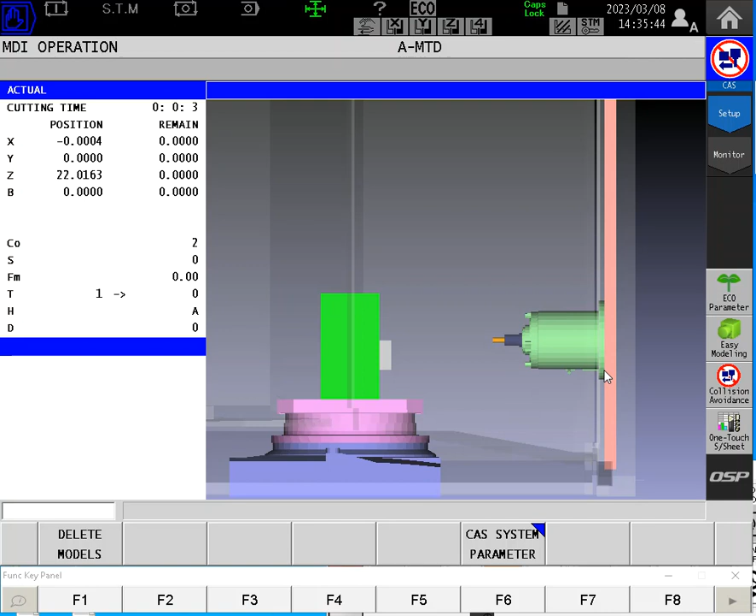Today we're working on fixture tracking, or CALL OO88. I'm on the road today, so this is going to be kind of a rudimentary video. I don't get to do all the flashy stuff I usually do, but we'll get the gist of it, right?

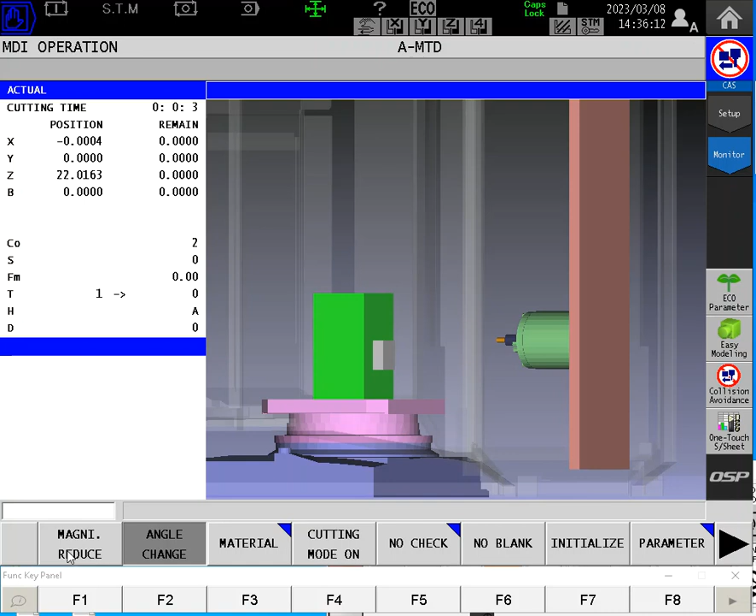So what we're doing here, we have our static fixture tracking system for horizontals that we're working on today. The code to activate that is CALL OO88. That is 2 O's, not zeros. CALL OO88. And I had a customer give me a shout and say, hey, you know what, I'm having a little trouble with it, and I'd really like to know if it's functioning properly. How can I check it?

So here's what I'm doing. I have my regular tombstone sitting here, this little guy. And then I just stuck a block of material on there. You know, doesn't matter what it is. Put a tool in the spindle, and I prefer a pointed tool, but right now I've got an end mill. That's going to work for us.

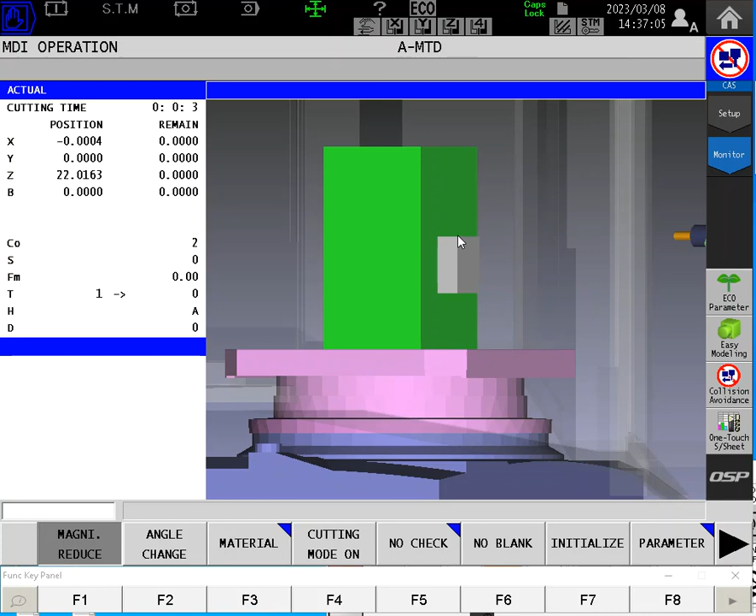So I want to set a work offset for this block, as I usually would, with a Renishaw probe, an edge finder, however I would do it. But I need to have a work offset set for that. Then I have to make sure that my tool is gauged properly. So right now, my work 0 is the face of the material, and the X0, Y0 is this upper corner right here.

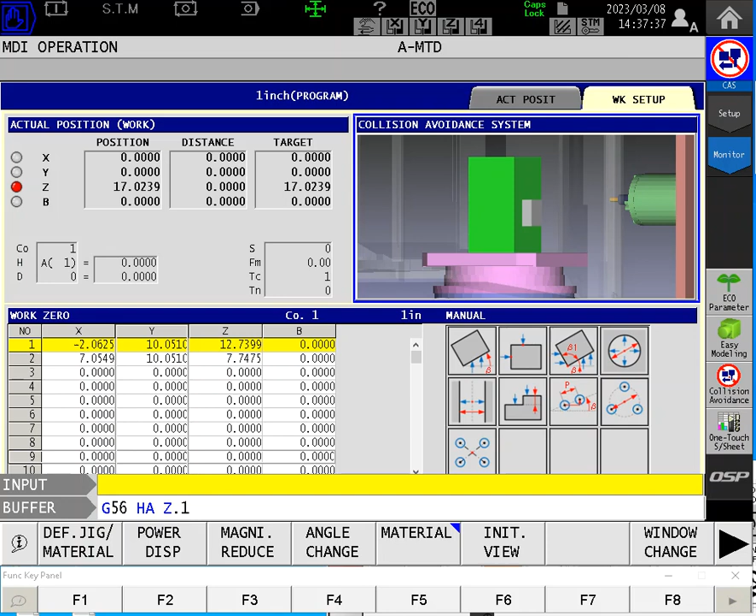So just to show you how this is going to work, I'm going to call up that work offset, G15H1. We'll execute that little code, and now I will say G0 to X0, Y0. And the machine will now position the tool directly over that corner. And if I G56 HA Z.1, that means read the tool height offset, move to 100 thousandths over the top of the part. Zoop. Now, if I blow up my collision avoidance screen here, you'll notice that.

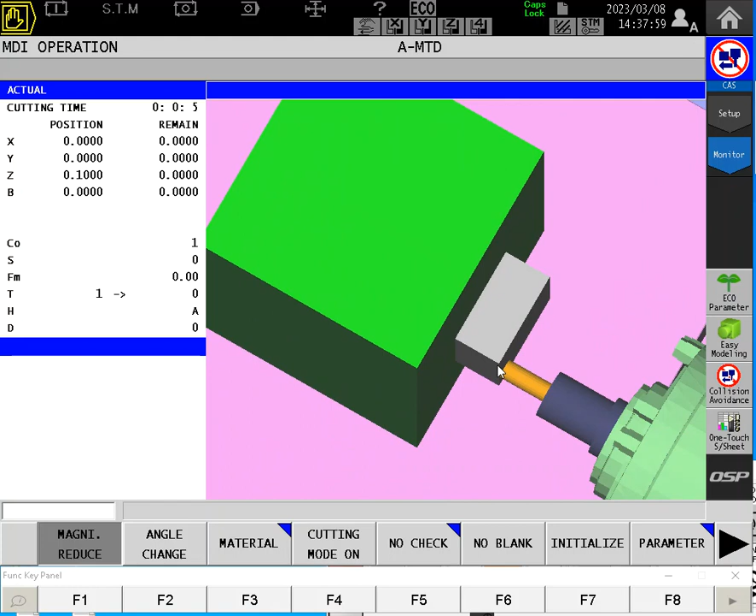Let's move it around so we can see. My tool is positioned. Oh, that disappeared. That's perfect right there. My tool is positioned directly over that corner of the material and 100 thousandths from the face of the part. So there we go. It'd be easier for you guys on an actual machine, but now I can see that the tool, if it were pointed, would be directly pointing at that upper corner of the material.

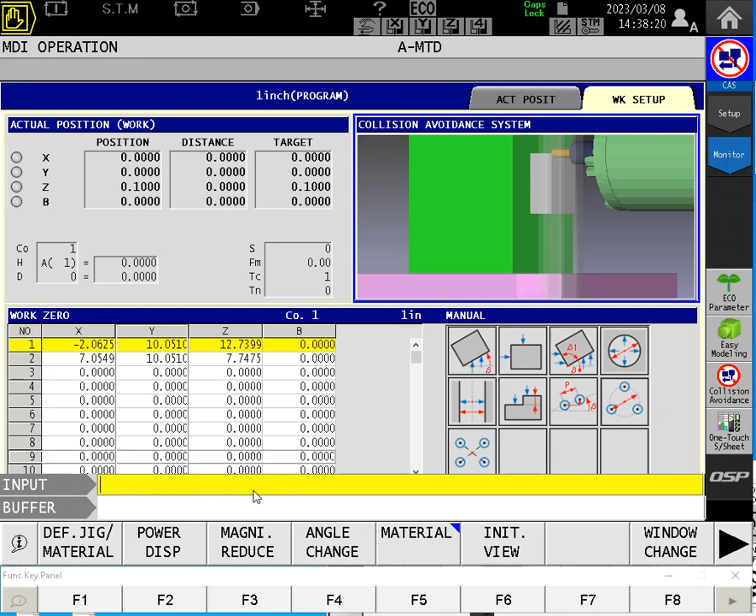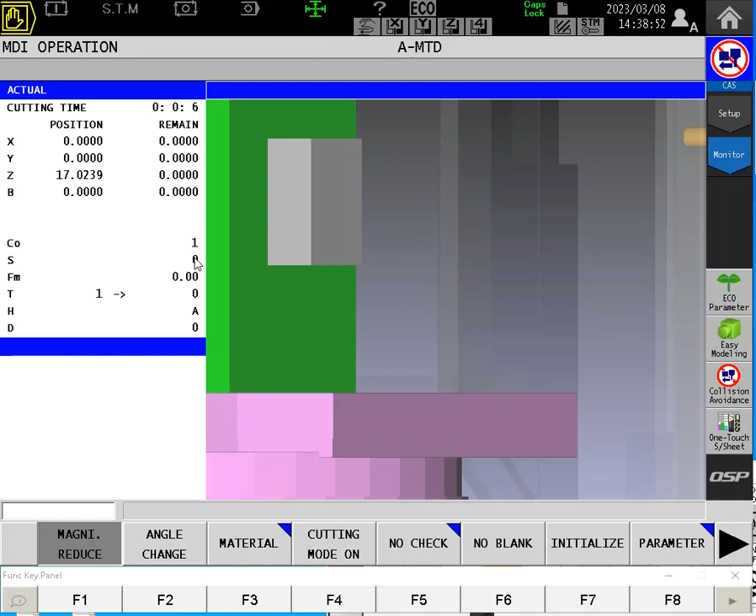Now that that's taken care of, I'm going to get the spindle out of the way. G0, Z50. We'll get him all the way out. Zoop. Now, because I picked the upper left corner of the block, that means that I have to rotate in the B270 direction, put the material behind us. If you want to do this easily, you could pick the upper right-hand corner so that you could swing to B90, and that way you can see instead of having to climb into your machine. But I just happen to have the ability to look at the top of the part, so I don't really care that I'm swinging to B270.

So now we're going to exercise the command for fixture tracking. CALL OO88 is the fixture tracking macro. And now here's where you might be ever so slightly different. If it's an older machine, the codes that you need are going to be PH, PP, PB. If your machine is newer, it will be HH, BB, and PP. But in my case, this is an older version of the macro.

So if you would like to move your origin in your CALL OO88, you would start by putting in an X, a Y, and a Z that would represent where your origin is moving from that corner. But in my case, I'm not moving the origin, so I'm going to lose that. First thing I'm going to put in is the PH. That is asking me, what is the work offset that you used when you set this part? In our case, it was G15H1.

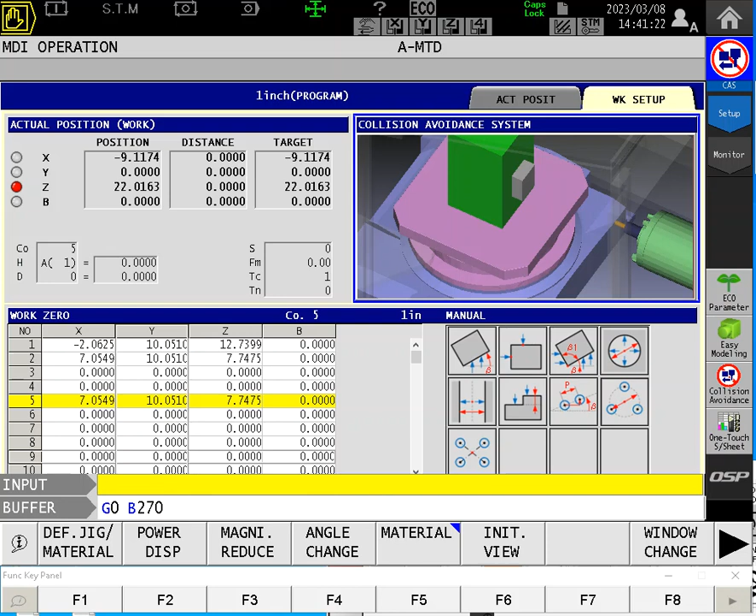So let's go ahead and give it a shot. Oh, and you notice that it also made that work offset active. It automatically does that. When you do a CALL OO88 and you specify a PP, that offset will become active immediately without you having to call it up. So now let's just say G0 to B270. And obviously we'll see the zoop. I don't have shortest distance turned on, but you get the point.

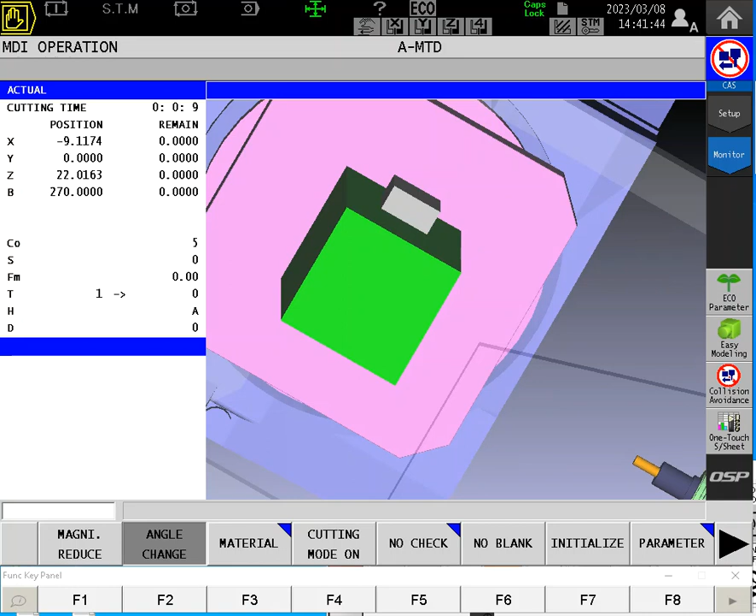Let's center this up a little better so that we can see what's going on. There we go. So now my origin is still that corner, but I've moved the axis 270 degrees. So now let's tell it G0, X0, Y0. And because we exercised the CALL OO88, when we command X0, Y0, zoop, look at where the tool went. And now G56 HA Z.1.

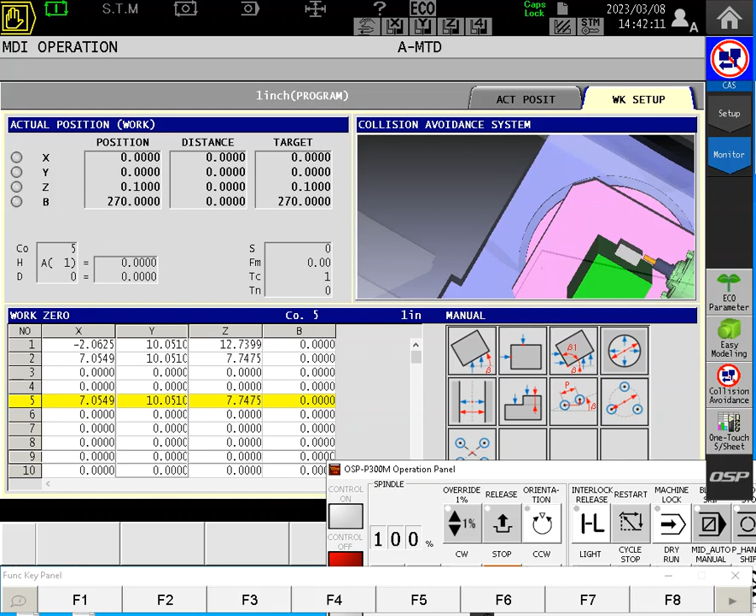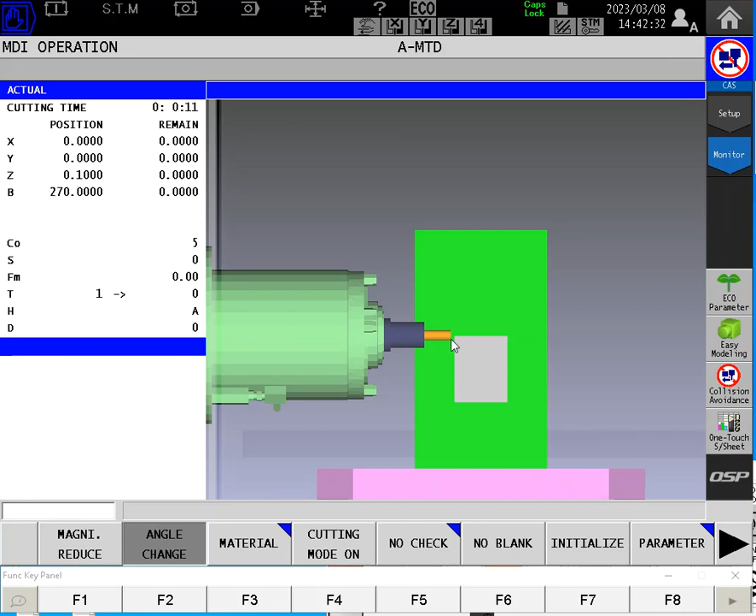Zoop. Now if I did everything right and my CALL OO88 parameters are set properly, that tool should now be pointed at that same corner and 100 thousandths away from the material. So let's look at it from the back side. Boom, got it. So I know now from that little test that my CALL OO88 on this machine is calibrated properly. Now when it comes to fine tuning, if you're a couple of thousandths off here or there, that's going to be a whole different parameter, and I would suggest you look in your fixture tracking manual that should have come with the machine.

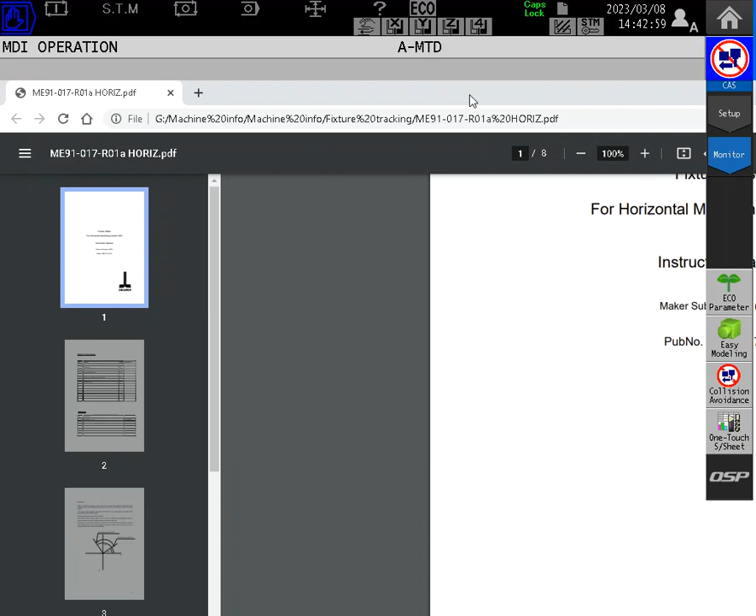Let's see if I can get that centered up a little better for you. Oh, wow, being on the road stinks. There you go. So there it is.

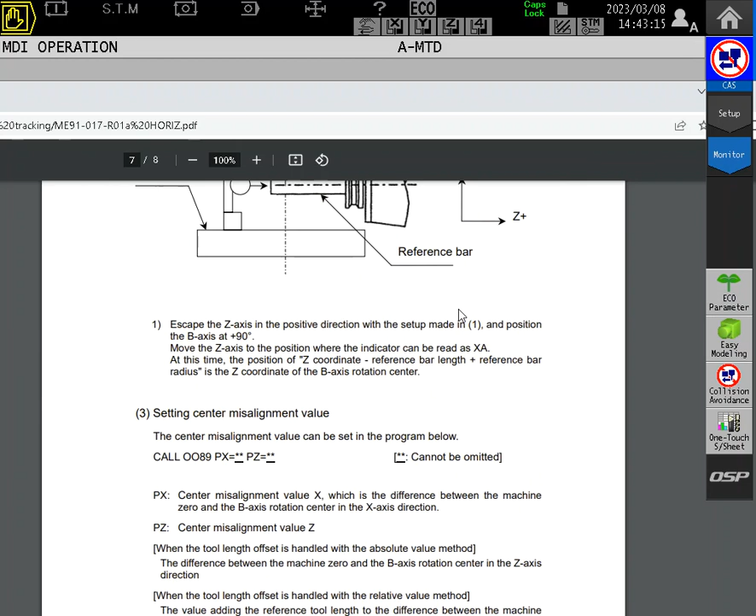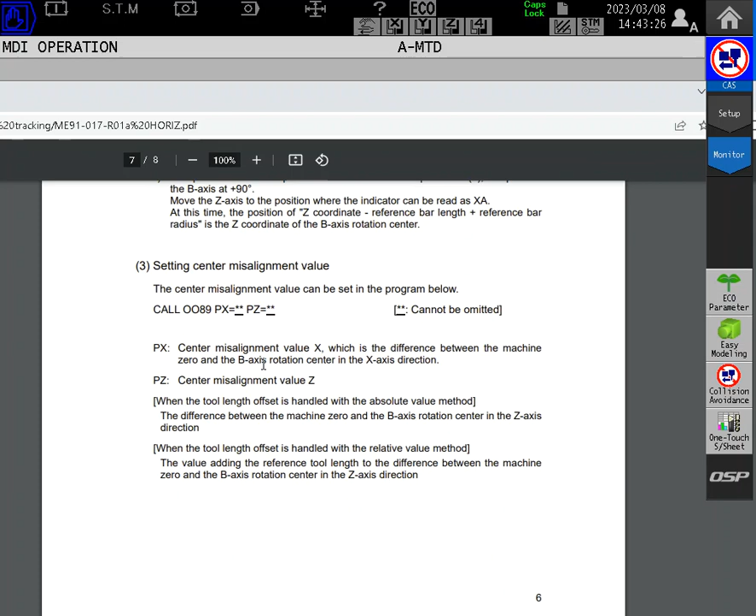The fixture offset tracking manual has a macro that we can use, outlines the procedure, and then tells you CALL OO89 with the modification to X and Z that you can key in and fix any errors. But at least now you know how you can prove to yourself one way or the other if you've done it right, if the parameters are set at least close.